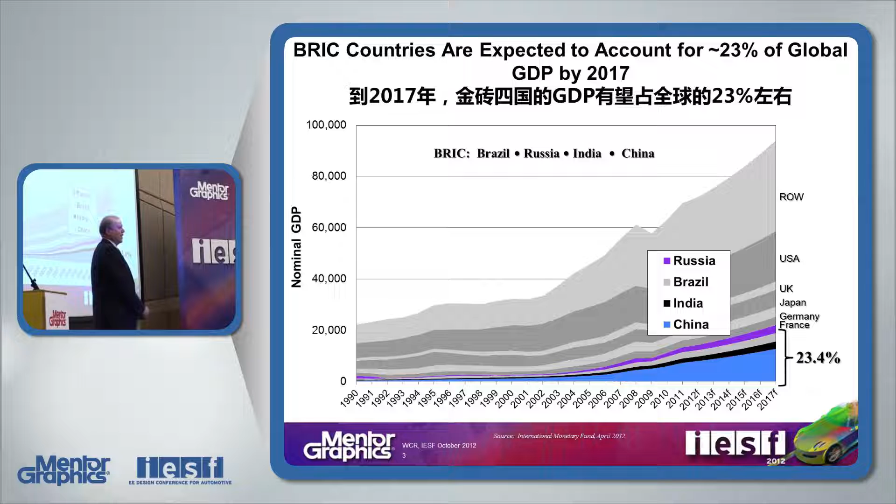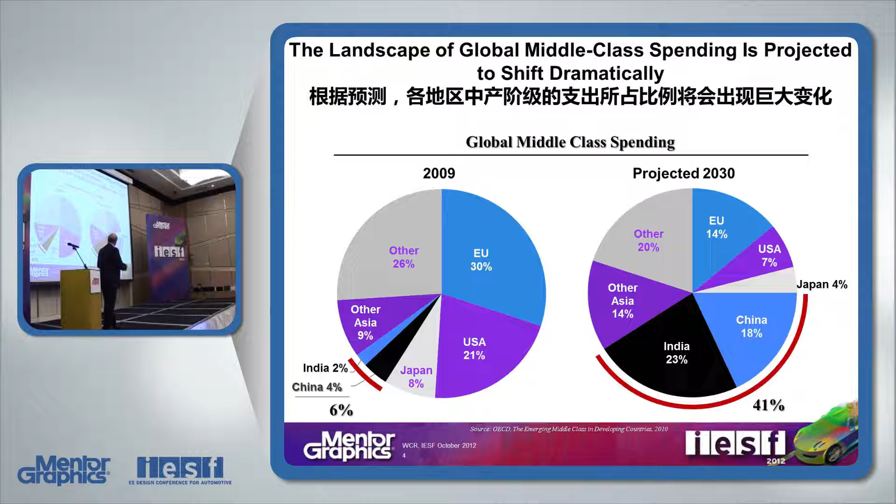The landscape for growth in spending by the middle class is shifting dramatically around the world. In 2009, China was only 4%. We expect it to be 18% over the next 20 years or so, and between India and China, about 40% of total spending. They are also projecting that China and India together will be greater than 50% of middle class spending over the next 40 years.

Gasoline, which is almost prohibitive in India, is still a very expensive part of owning a car in China, ranging up to something like a third of daily income.

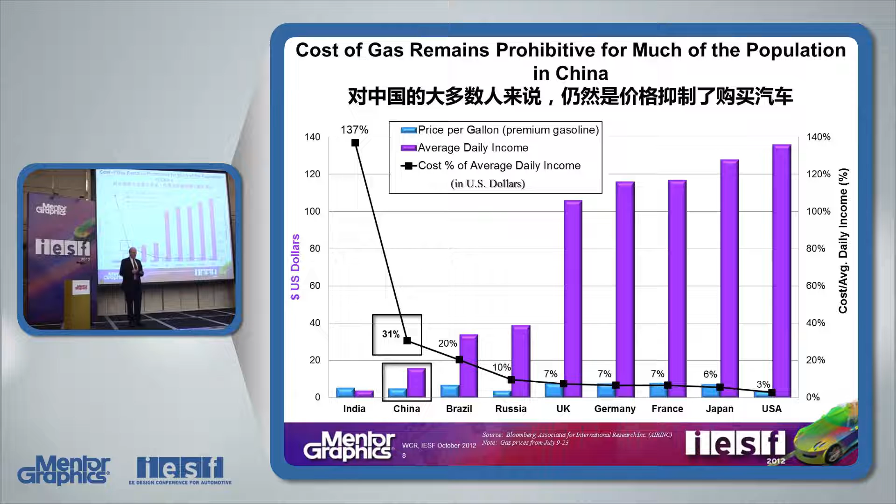And the Chinese market is very dynamic and very diverse. Every type of vehicle is required, and the markets are growing for all of these. The vehicle mix in China is very different from other parts of the world, being a mixture of two-wheel vehicles, passenger cars, and commercial vehicles, making up the total.

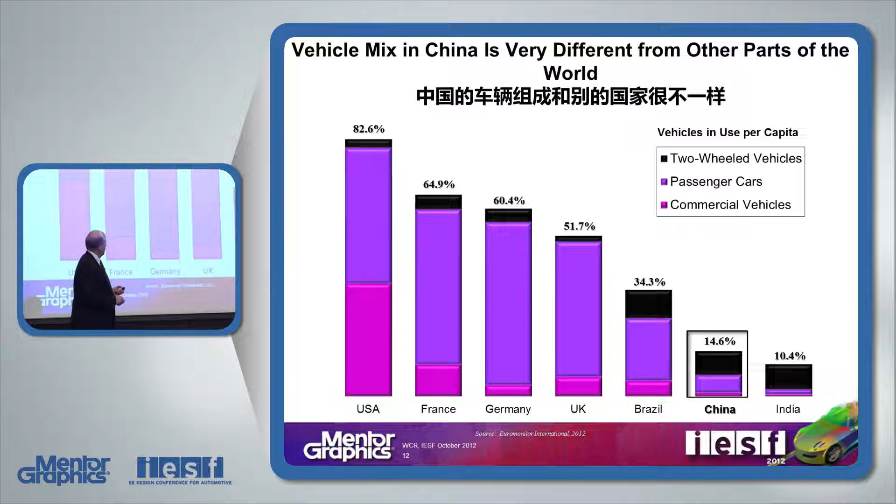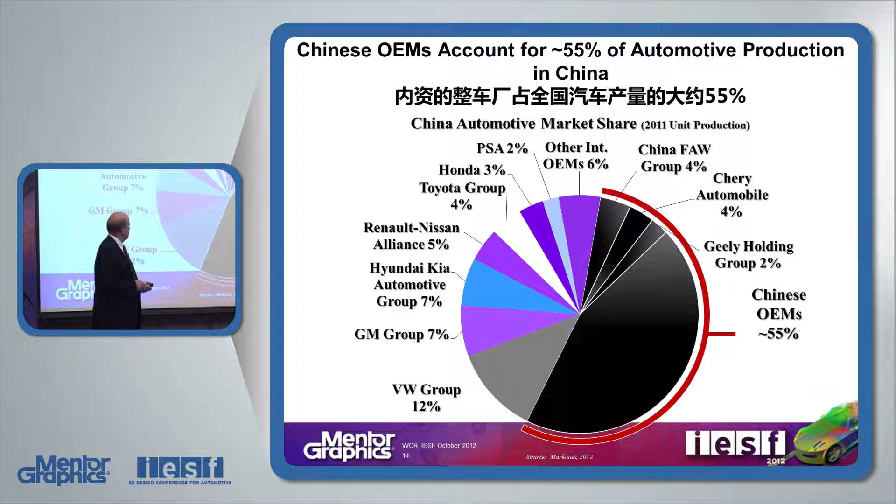Per capita vehicle use in China is increasing both rapidly and very consistently, a steady and very rapid growth rate. Chinese OEMs account for over 55% of automotive production in China. And China has a very highly skilled workforce.

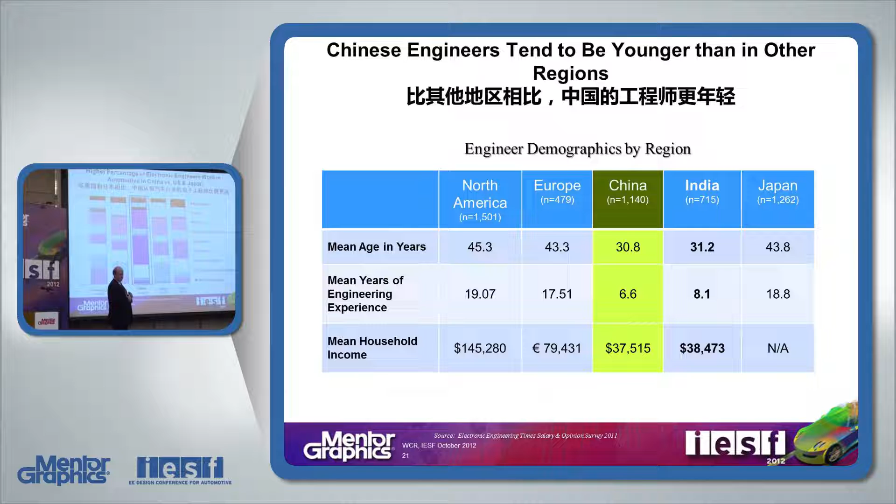In China, we have a higher percentage of engineers working in the automotive industry than we do, for example, in North America, modestly larger than in Japan, and a little less than in India, but still a significant available resource for engineering.

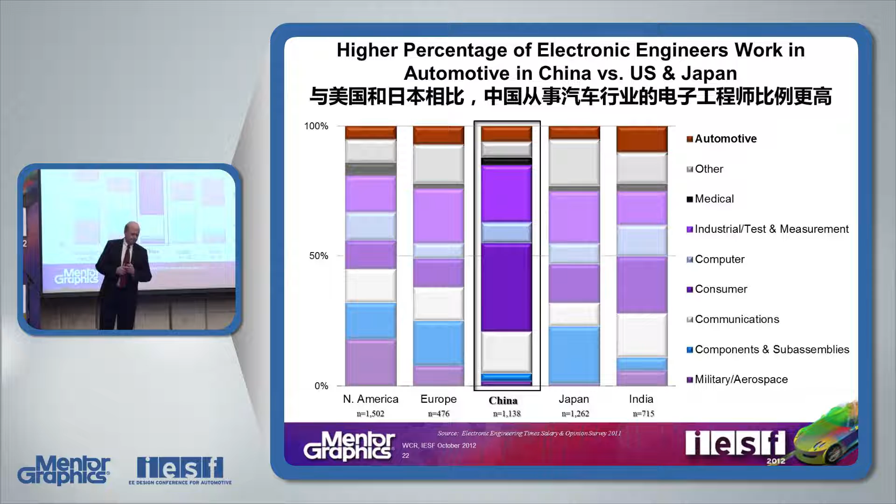So what about global challenges in the automotive industry? Alan Mulally, the CEO of Ford Motor Company, joined the company from Boeing, and his first reaction to the automobile industry was shock at the degree of complexity. Here was a man used to managing a company that built complex aircraft, and yet configuration management for the automotive industry was far greater than what was experienced in aerospace.

In fact, automobiles have become among the most complex portable computer platforms. There are really two unique aspects to automobiles. One, this configuration complexity means that electronically there are millions and millions of configurations required to support automotive production. The existence of options means that few automobiles have identical wire harnesses.

And secondly, the automotive industry today has adopted the most advanced electronic networking, computing, and embedded systems, and is rapidly growing in complexity in the amount of embedded software and the complexity of sensors, so that the idea that humans could design the electrical wire harness is rapidly becoming an impossibility as the complexity grows.

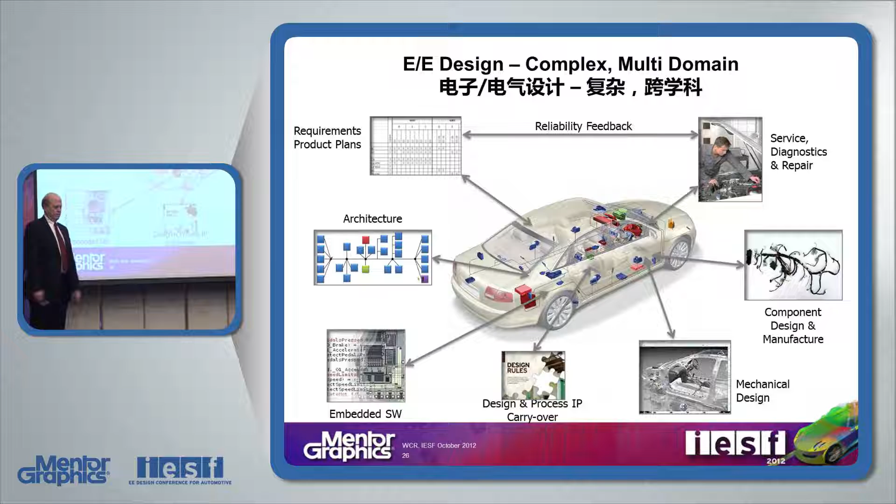Embedded software is becoming an enormous problem for the automotive industry, as it is for other systems companies. And so the same techniques used in the most advanced computer systems now have to be adopted and supported in the automotive market. The lines of code that must be supported is rapidly growing, and within the next few years, it will be quite common to have 300 million lines of code in an automobile in production in a commercial market.

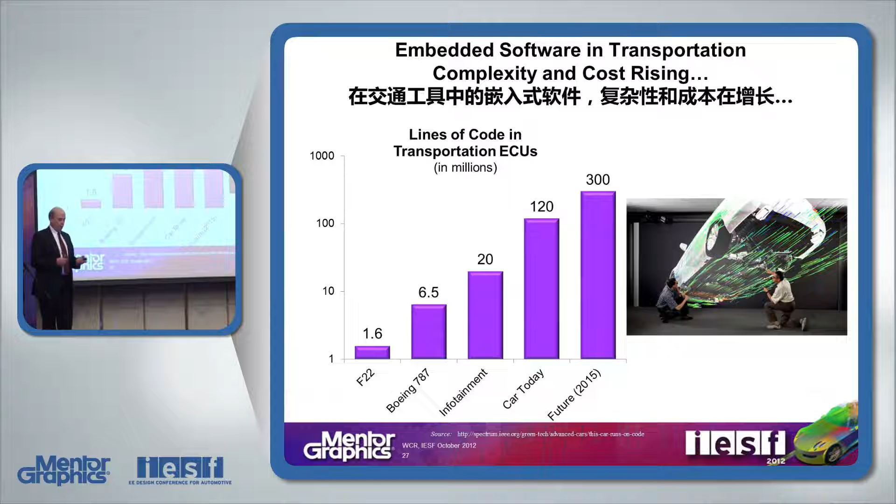And each of the suppliers, of course, has a similar process, which is followed by a validation and verification. A validation to see that we have designed what we have intended, and verification to see that we've designed it properly so that it will work without problems.

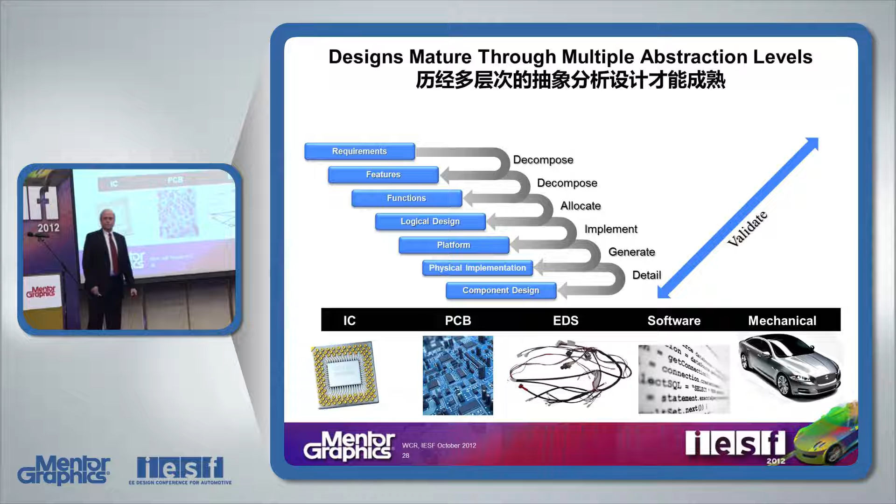So for most companies, most OEMs, the V becomes the driver of time to market, as well as reliability, maintainability, safety, conformance with regulatory requirements. So each supplier in the supply chain needs to compress the amount of time it takes to do an iteration of design if the OEM hopes to do the same.

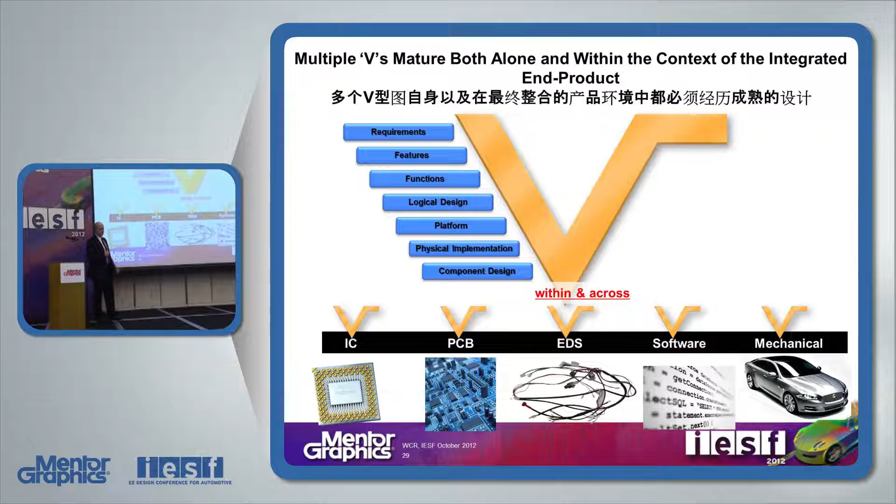Compressing that V is the single biggest thing that will allow us to accelerate the development of vehicles, but much more importantly, to evaluate alternatives, to be able to find an optimum design using less time, and of course, get to market sooner than our competition and grow our market share.

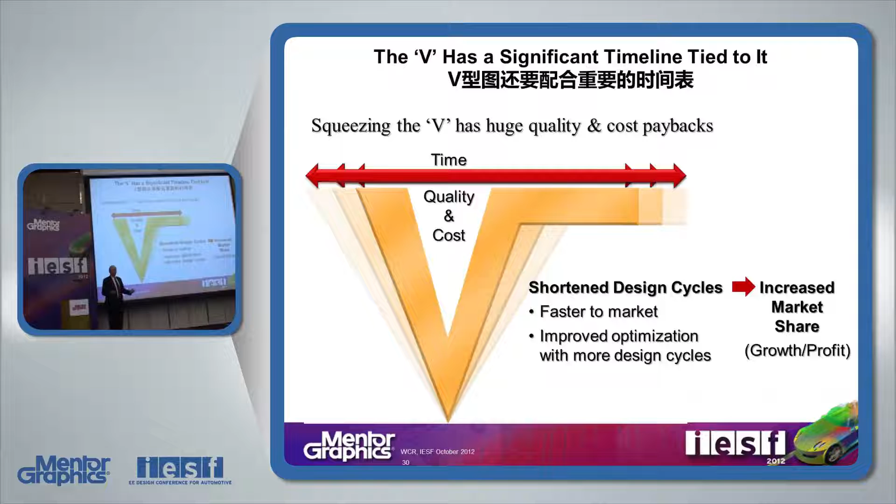There are really three things that impact the squeezing of this V for improvement of the process. The first is creating data flow, data flow down the V so that data is never re-entered, it is just reused.

Providing that digital continuity so data is available to all the organizations that participate in design, from the divisions of the OEM to the companies in the supply chain, and the ability to use that data to simulate at higher levels of abstraction so that we can create correct-by-construction designs.

And that is, in fact, the second and most promising area of design today: the ability to automatically synthesize the design of a vehicle, especially from its electrical system. Through design automation, we can assure that a synthesized design that turns a logical design into a physical design is, in fact, provably correct and accurate, and that we are not introducing errors in the translation of information.

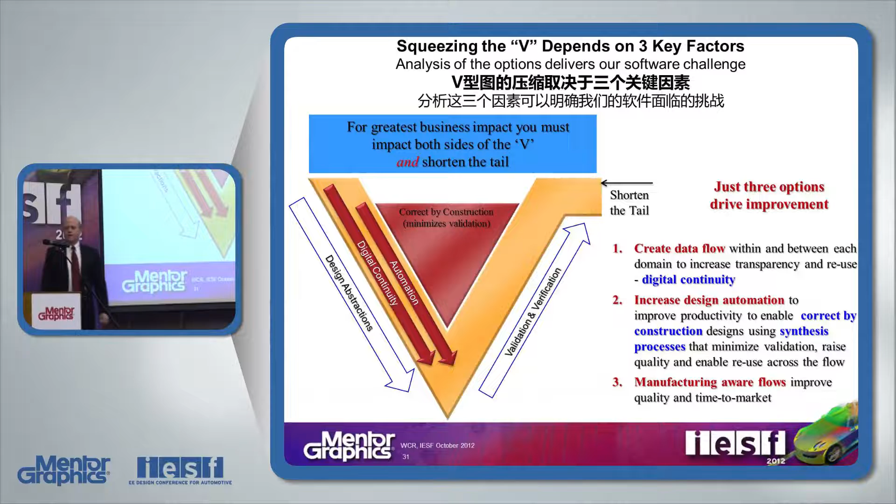And lastly, manufacturing aware flows, the ability to design with constraints so that when the car goes to manufacturing and service, we follow a set of rules and we verify them so that it will in fact be manufacturable without problems and will be brought up quickly. And with this, we can hope to have a major impact on all aspects of schedule, quality, and capability.

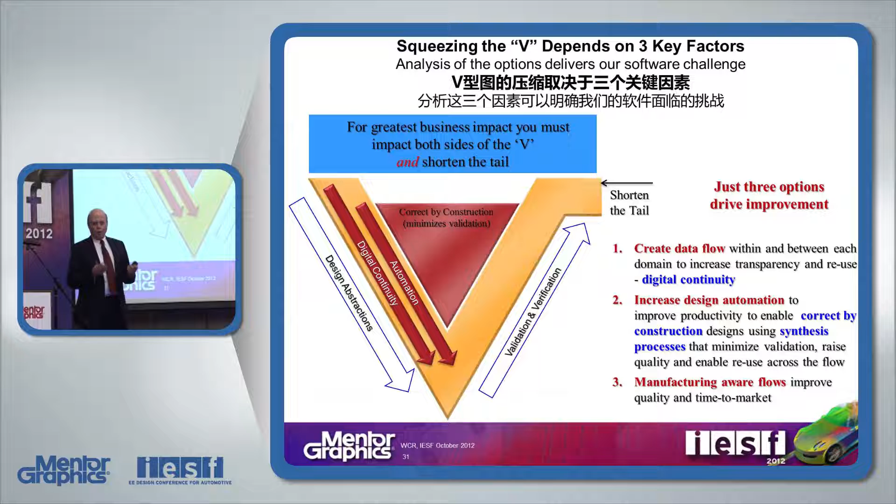So a part of this is information management: the ability to tie together the enterprise, the corporation, the entire supply chain into a set of simultaneously updated and current information. To do that in modern companies, some type of adoption of the standards associated with service-oriented architectures has been applied, so the entire entity can access information elsewhere, update it in real time, and have available what's needed for an optimum design.

So let me talk about a few trends that I think are most important in what's changing design today. First, constraint-driven design. We've always designed with constraints. The difference now is the process can be automated.

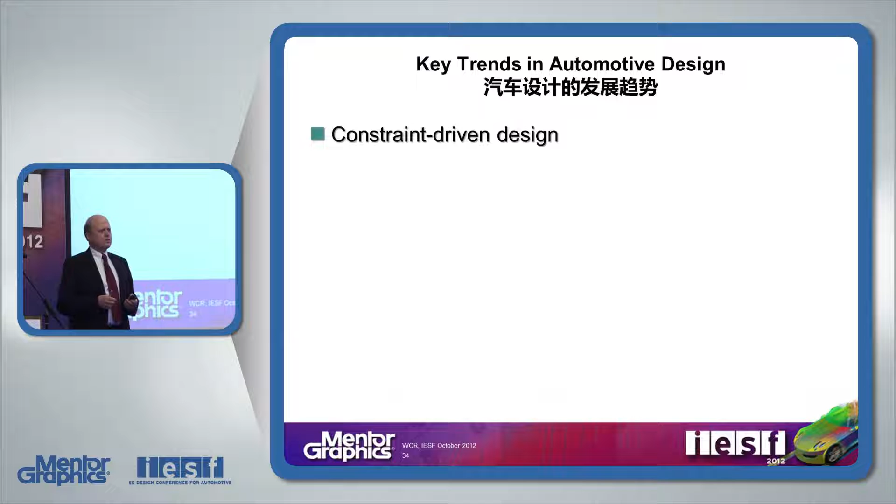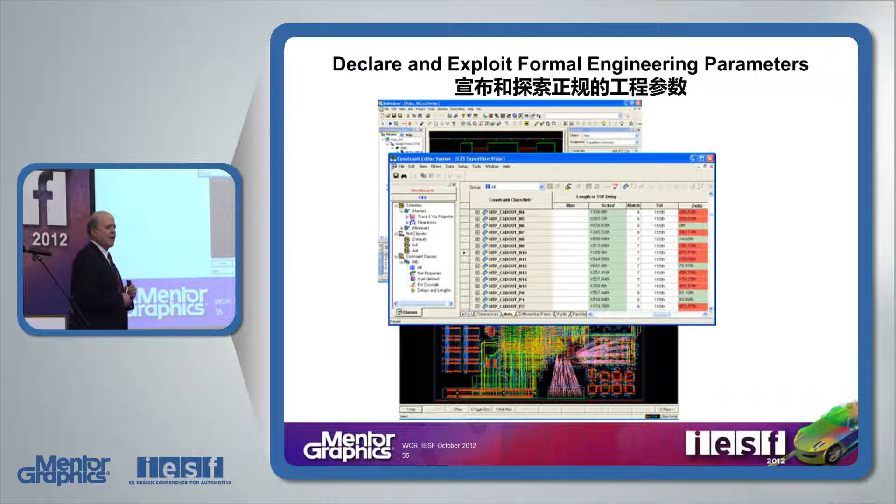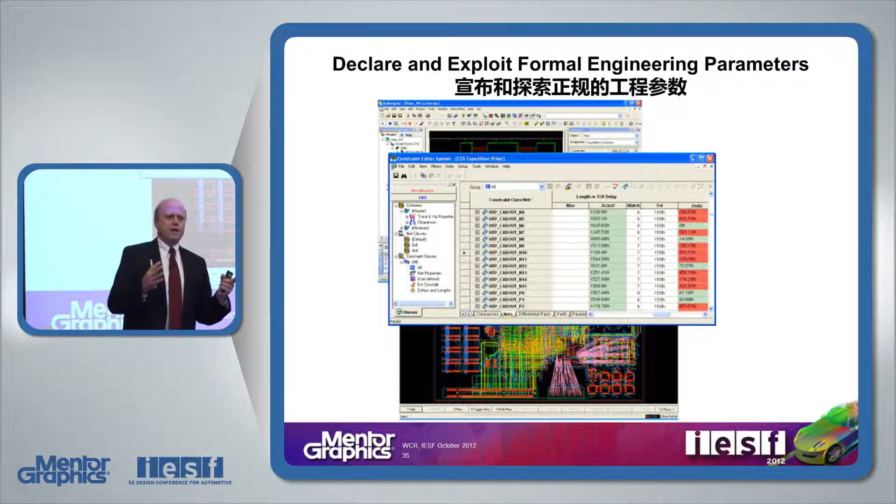This is a screenshot of design software that Mentor's customers use in designing electronic products. For decades, we've been able to design printed circuit boards and integrated circuits with very complex constraints. Today, the same can be done in developing a wire harness or a full electrical system for a vehicle. The constraints may be practices within a particular company. Maybe you found that you should have no more than 5 wires in a bundle in a wet zone of a car, and that becomes a design rule or practice that you found to be necessary. Or it can be constraints set by regulations or other changes in the manufacturing process. All of it is becoming more complex, and to ask a human being to create a design that obeys all of these constraints is virtually impossible.

And so it has effects everywhere in the design. The selection of components, for example, is driven by constraints. What type of connector? What is your corporation's experience with reliability of certain suppliers? What are other physical constraints that are required?

By having a modern wiring environment, a complete electrical system design environment, it becomes possible to automatically check these constraints, but more importantly, to iterate, to produce a major trend sweeping the automotive world today: generative design. No more is the wiring of a vehicle drawing-based in leading companies. It's data-based. It means that once you give a set of constraints and a set of connection points, you should be able to automatically generate wiring configurations that conform to the constraints you require. The best part of this is that many alternatives can be tested in a short period of time.

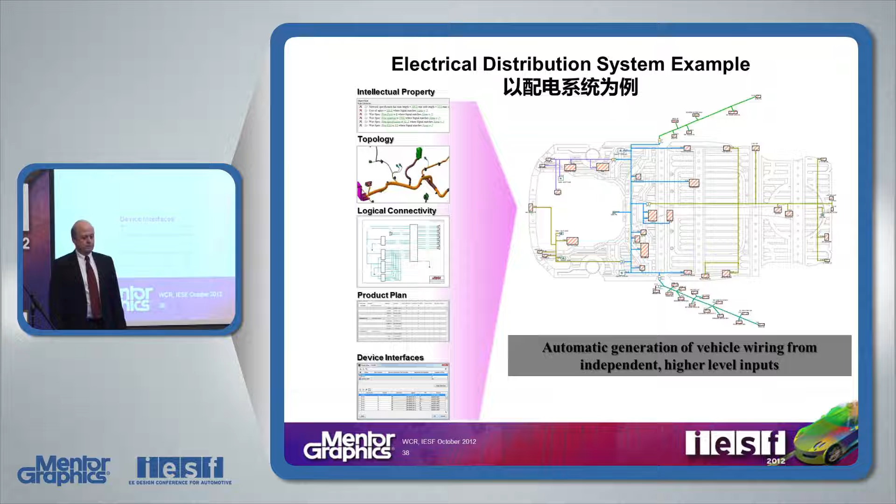A third phenomenon, one that is also sweeping the world, and one where China has a unique opportunity because you have less legacy practices to get rid of and a better opportunity to advance to the most advanced approaches to design. That is AUTOSAR, a standard which over the last 15 years has evolved and now is increasingly becoming a methodology for design of automobiles.

So in a typical design in the past, every electronic control unit is a complex combination of embedded software, mechanical design, frequently operating systems, firmware, and all of this creates difficulty to change, complexity of design, and other problems. AUTOSAR first makes the specification machine readable. So instead of written specifications, we have unambiguous descriptions of what the design should do.

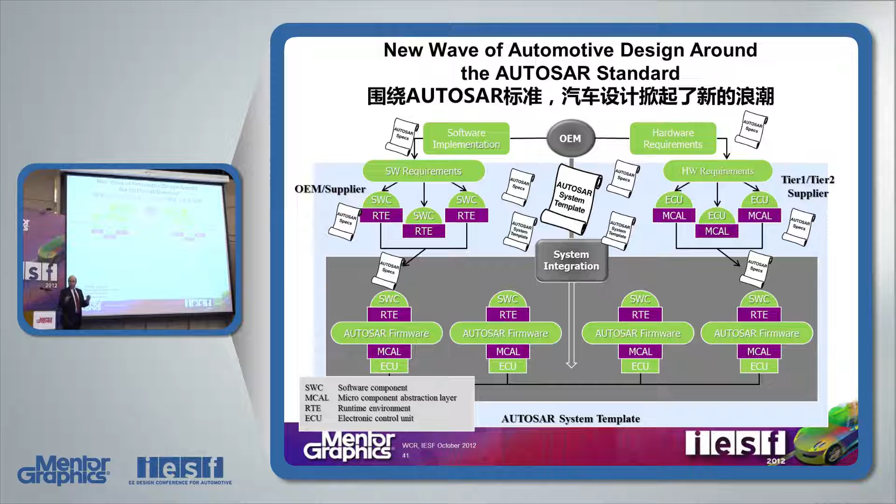With AUTOSAR, there are two standard interfaces: the runtime environment to which every software component must comply, and then the microcontroller or microcomputer abstraction layer to which all the ECUs must conform. Now with this, we are able to generate designs in different parts of an organization, and the software does the integration.

The basic AUTOSAR firmware serves as the interface between the software and the ECUs, and Mentor Graphics became the first company to support both AUTOSAR 3.0 and then 4.0, 4.2 worldwide, and today we are inundated with companies that want to move faster in the adoption of AUTOSAR.

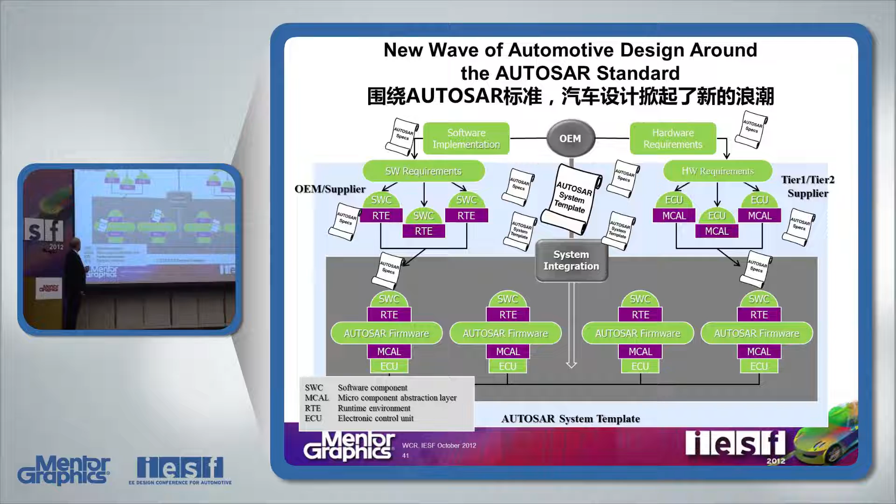So, in an AUTOSAR system, because there are fixed interfaces, software components can be retargeted to available compute resources in the car without disrupting the verification that has already been done. Similarly, ECUs can be altered, changed, corrected, and still comply with the microcontroller abstraction layer, and so support and verification of the design becomes much easier, and it greatly accelerates the design process.

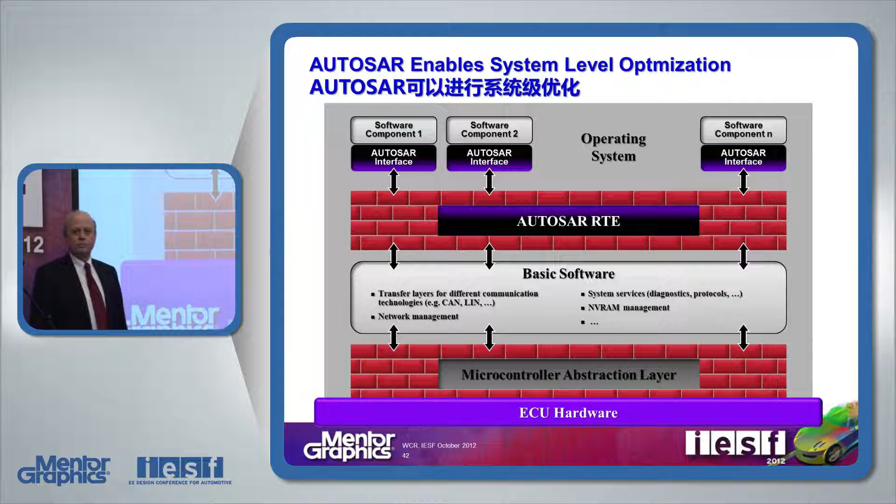Today, there are something in excess of 130 different platforms being designed with AUTOSAR this year, and we expect that to grow another 50 to 70% next year, rapidly becoming the standard for automotive design.

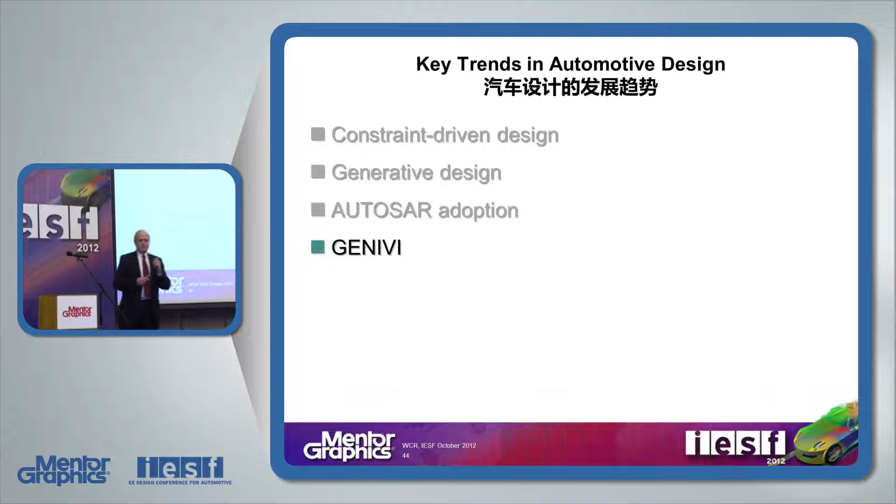Another major trend that's important to all of us is GENIVI, in-vehicle infotainment. Formed in 2009, GENIVI now has over 170 automotive OEMs that participate in this infotainment standard.

Automotive infotainment is becoming more complex just as all consumer electronics is increasing in complexity. The GENIVI Alliance is based upon open source Linux, the most advanced of existing operating systems. Mentor is a member of the board of GENIVI and has worked actively with them, and is the leading provider of open source software development tools.

But it's much more than simply the operating system. It means design tools tied to specific processors. It means a complete environment for support of systems on a chip - embedded Linux, GENIVI, and Android support, as well as the ability to provide a human interface to the application and the tools to automatically generate that interface.

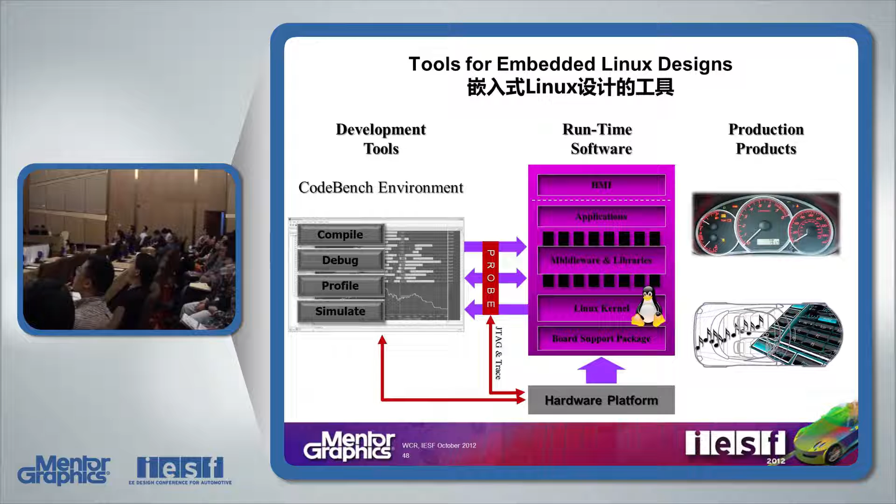Mentor Graphics provides a development environment for GENIVI-based applications, as well as other open source applications, called Sourcery CodeBench. 20,000 copies of Sourcery CodeBench are downloaded every month by developers of open source software.

It supports verification of runtime, middleware, hardware probes to verify the design, as well as support for production products and advanced operating systems like Android or Unix.

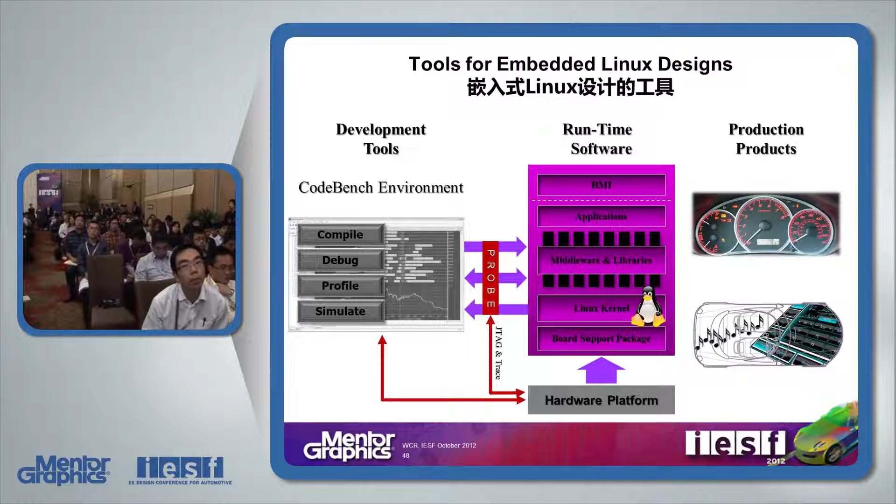Another trend that I hear about at every one of these meetings I go to, and I go to a lot of these events around the world, is ISO 26262. This is not a law, it's not a regulation, and yet everyone is interested in compliance with 26262.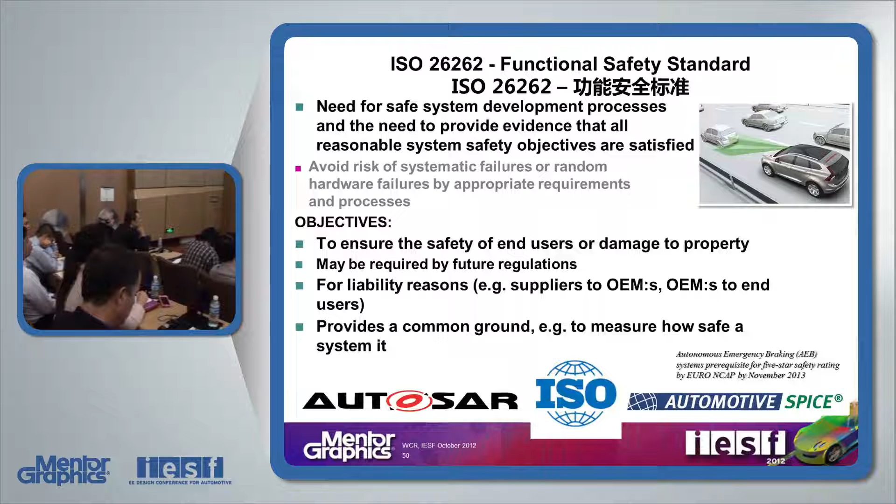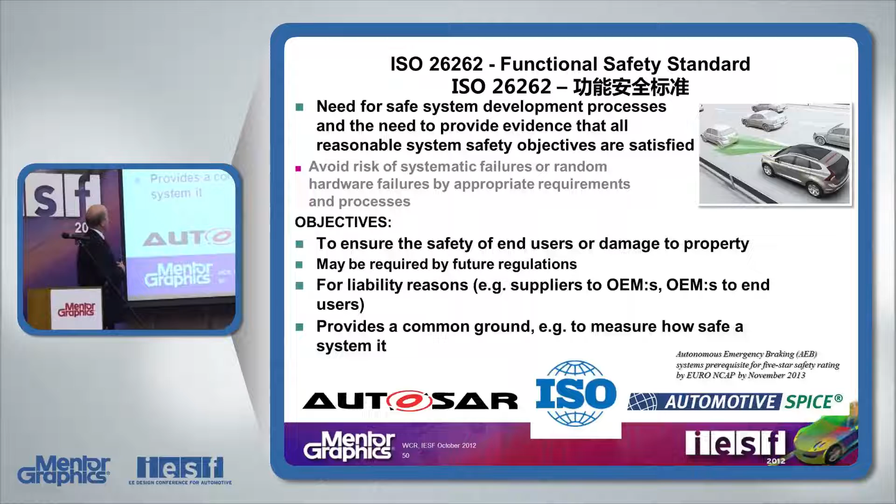Why? Well, because it is a precursor to what will be required for safety in vehicles in the future, but more importantly, it's a set of guidelines which, even if it never became law, would be important in design practices to assure that independent systems are independently testable, that they don't interfere with one another, that design practices are such that safety can be designed in and the risk of failure can be minimized.

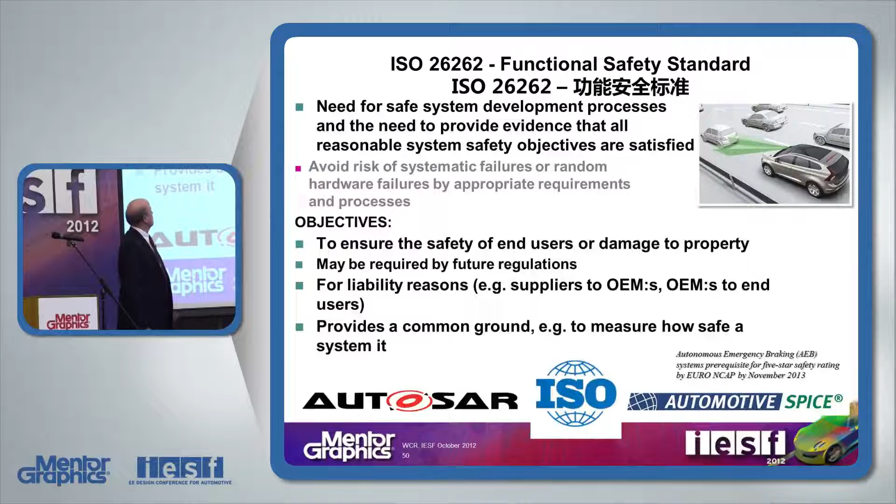Fortunately, AUTOSAR and ISO 26262 are intimately connected. The same practices that evolved with AUTOSAR have been embedded in the foundation of ISO 26262. So Mentor's AUTOSAR implementation, our VSTAR product, was developed in parallel with our requirements for ISO 26262.

The work products required by 26262 are automatically generated. It's developed with the Automotive SPICE 3-level standard process. And the kinds of features required for safety are part of the development process, like memory protection and so forth.

And other tools for AUTOSAR development, like the VSX family of tools for analysis and validation, also conform and provide reports that evaluate the ISO 26262 implementation capability and assure that design practices are best in class for both safety as well as for AUTOSAR.

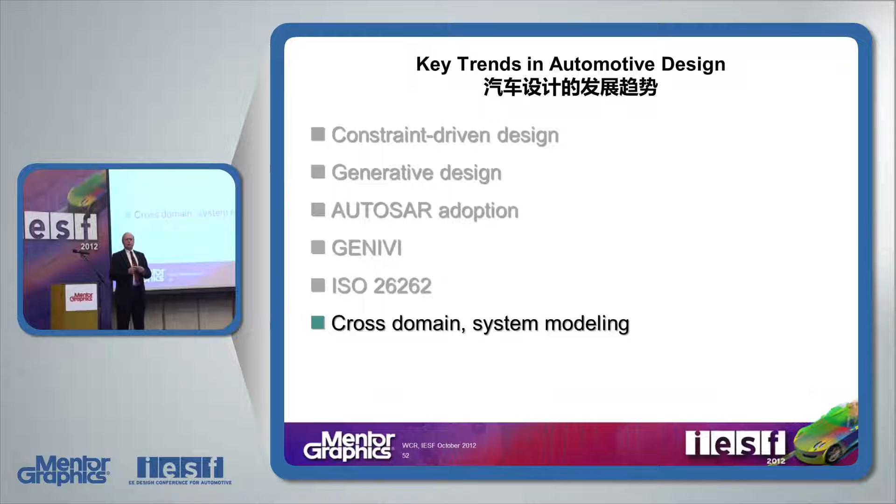Another area: cross-domain system modeling. So while much of our attention has gone to how do you conceive, develop, support, maintain, and service the electrical wiring of a vehicle, the subsystems in a vehicle need to be designed and verified as well, and many of them involve multiple disciplines, multiple types of physical phenomena.

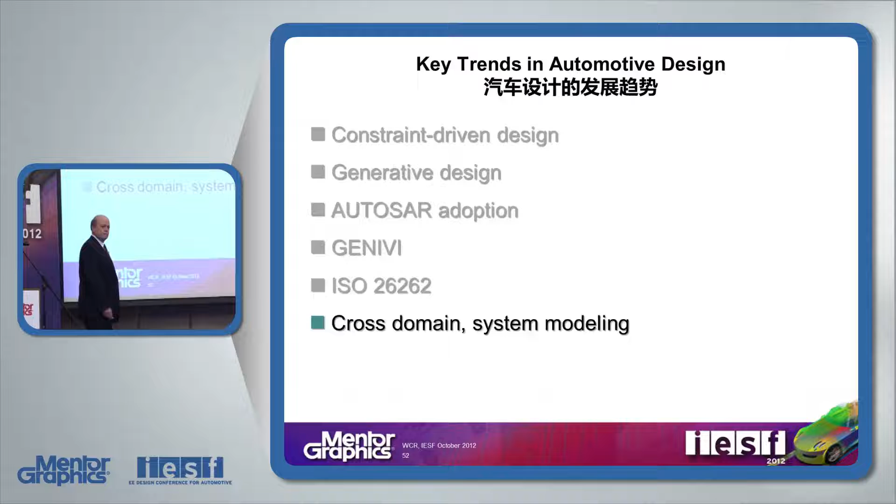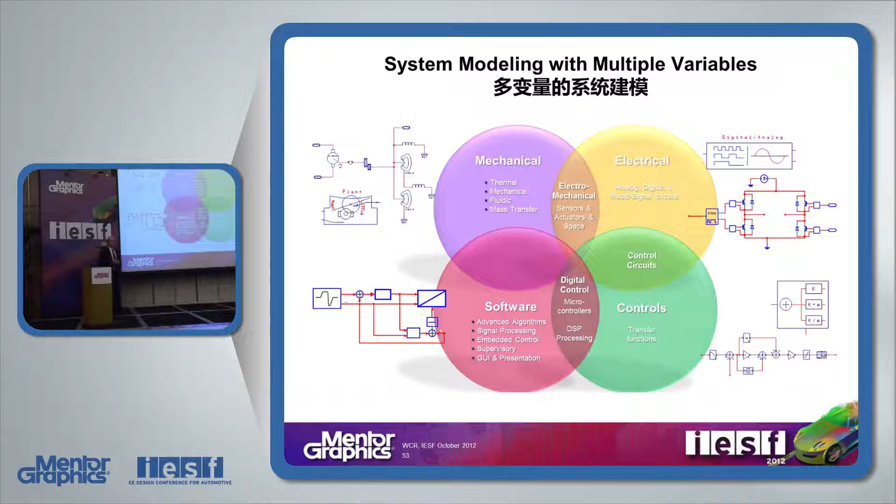System modeling in multi-physics is becoming a new type of simulation that leaders in the electronic design and automation industry are now supporting. So it's quite possible to take existing models or create new models from the mechanical domain, the electrical domain, control circuitry, software, optoelectronics, and create a system-level simulation to verify those designs.

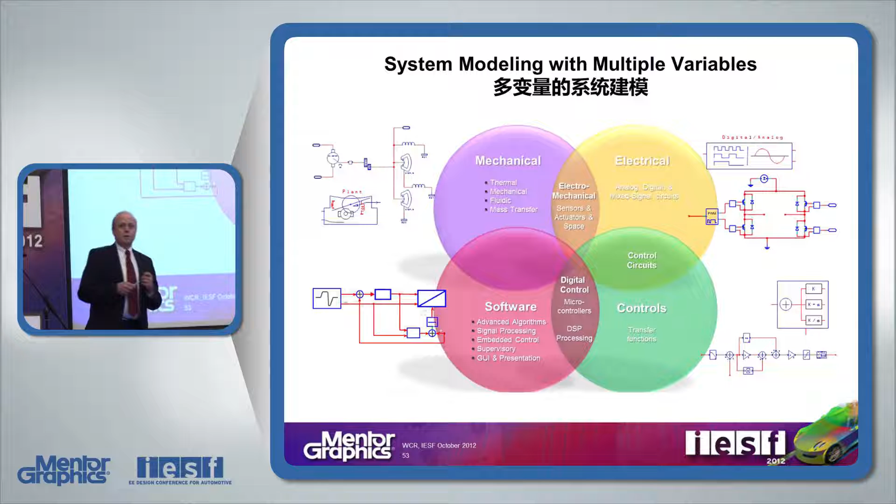We have dozens of system examples of people who have been able to dramatically reduce the time and cost of design through multi-physics simulation.

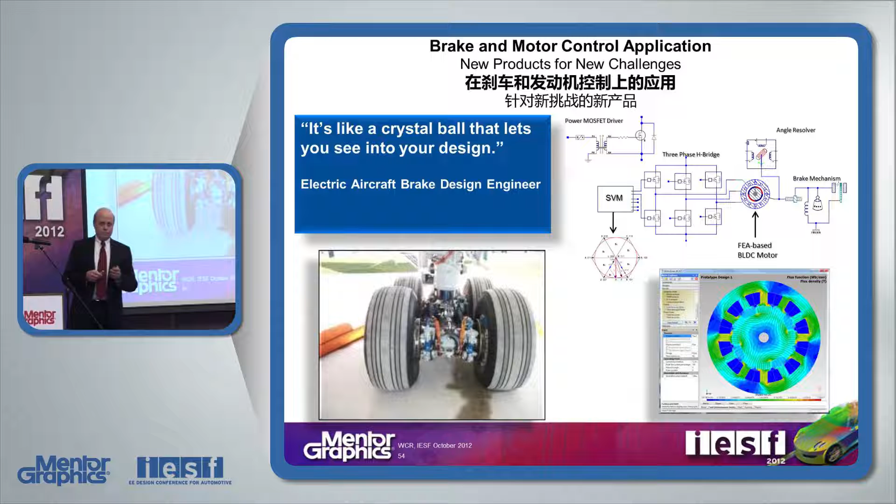Now, just because you use one supplier's tool for designing the electrical wiring in a vehicle doesn't mean you don't need to put together other specialized tools.

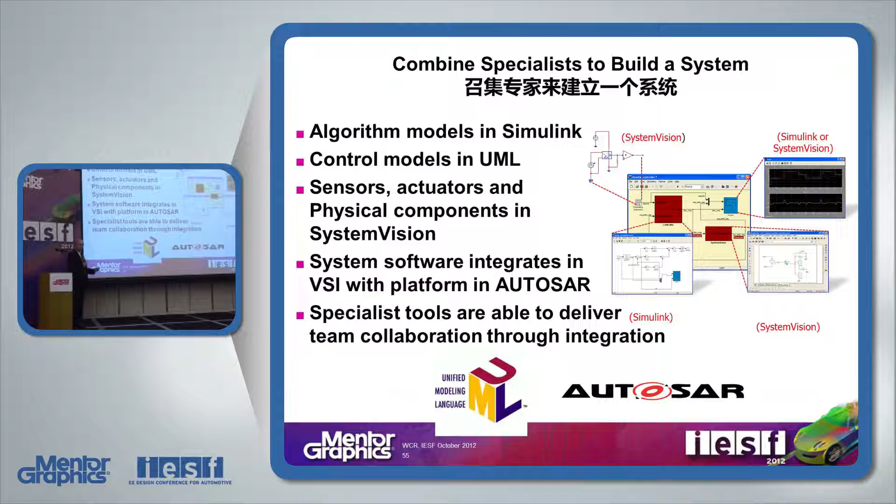At some of our events, we've had partners like MathWorks, for example, do joint demonstrations of Simulink operating with our multi-physics simulator, SystemVision, creating a full system verification environment from first principles of algorithms through execution of the physical implementation, working together, being compatible with AUTOSAR, and in many cases using UML or MATLAB, whichever is most appropriate, for description of the high-level physics.

Finally, linking data across the enterprise is a key enabler for all of this to work. Traditionally, the PLMs for organizations have tried to tie all the data together, all the data formats, in one database. While this has worked for many years, as designs become more complex, it will become less and less feasible.

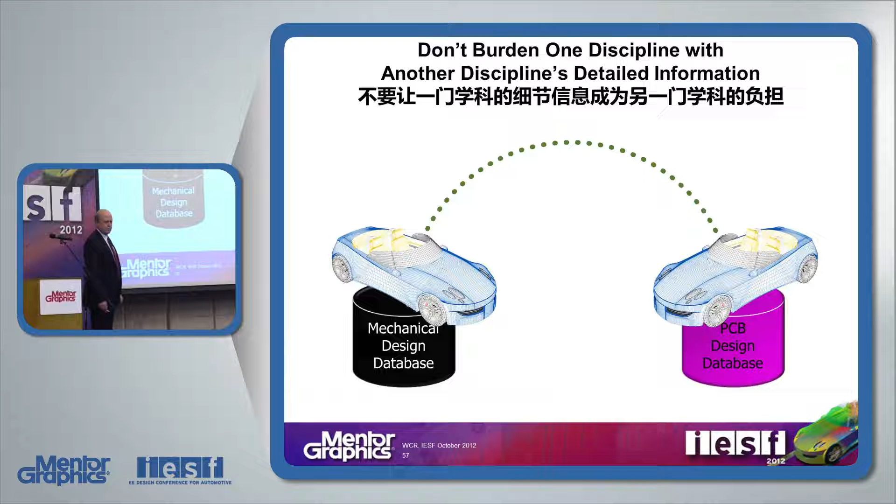The early standards were based on mainframe computers, where a central database communicated with the individual parts of the organization doing the electrical design, the functional design, the mechanical design, and data formats were translated and typically stored in the central database. While this works, it becomes increasingly difficult as these become more and more sophisticated.

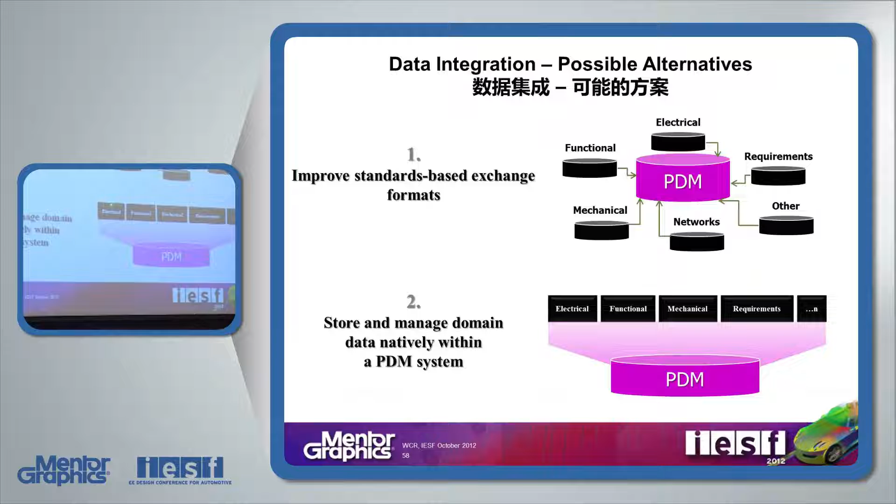Another very popular approach today, that of course Mentor interfaces with, as we do all PLMs, is one that ties together everything in a single PDM system and forces each discipline to use all the same data formats in a single database. This, while it works for relatively simple design, also will become increasingly dysfunctional with time.

Where the world is going is collaboration and federation, with services-oriented architectures tying together the various types of design that need to go into a system, and with the PDM as a peer working in a collaboration environment.

Ultimately, federation wins because it offers the highest performance. Electrical designers get to use tools optimized for electrical design and get access to the information they need from the mechanical design and other design systems in the vehicle. Everyone gets to interact with an interface that provides the maximum ease of use, and the whole system can be updated without updating and re-verifying the entire enterprise, but simply updating portions of the design environment.

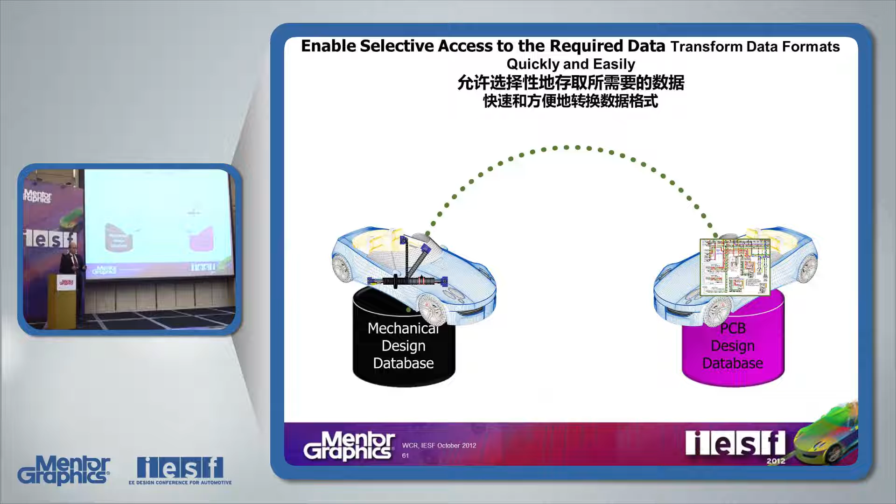So to summarize, there's a tremendous opportunity here in China for all of us. It's why Mentor Graphics is spending so much of our time here and dedicating so many resources to help the automotive OEMs that are servicing the China market and the export market. It's rapidly growing. It's the number one market in the world, and there's a very well-trained and capable workforce of engineers and technicians to support a rapidly growing automotive industry.

The complexity is both a major challenge, but at the same time it's an opportunity, because existing automotive manufacturers around the world have to do away with their existing systems and develop new ones. In many cases here in China, we see much more rapid adoption of new technology. But the companies that do aggressively adopt the leading edge technologies and the standards will have a clear competitive advantage, and they will be the leaders of the future.

It's our wish at Mentor Graphics that we can work with you to become those leaders, to satisfy those needs, to help your customers, and to grow your companies and your country as we move into the future of automotive electronics. Thank you.